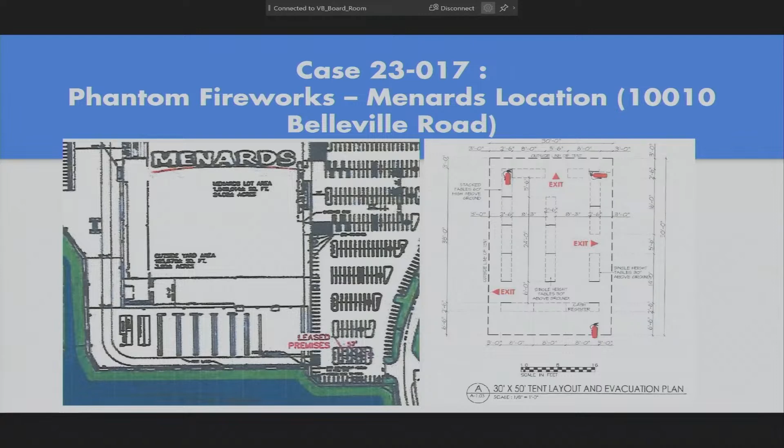Just for clarification, in the township letter, it says that during non-operating hours, all products will be returned to their fireproof storage unit. So I'm just, for clarification, the example that you gave, I don't see anything on here that describes it as a fireproof storage unit.

That's just, I mean, that's the storage unit we've been using. We use Mobile Mini. If something happens, there's a fire, you've got the 4 metal walls that are going to prevent it. I mean, after 3-4 hours, possibly something can happen. But again, this is my 13th season in Michigan. We've not had one problem with our tent or our storage unit or even being robbed.

Is it required to be a fireproof storage unit? No. A lot of companies don't use fireproof units, a lot of companies use storage units and they use pods, the smaller ones. Again, these are the bigger ones, the heavy duty ones. So again, this is what we choose to use. They're heavy duty, you can't break into them. You've got the special puck lock that you have on them. The only way they can break in is if they cut into the side of the wall.

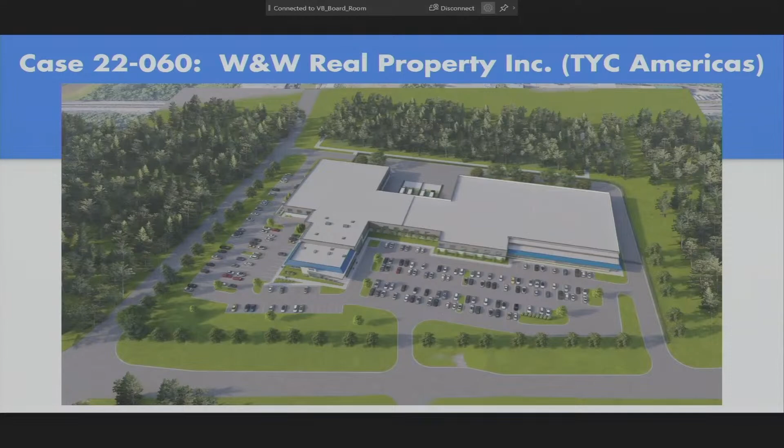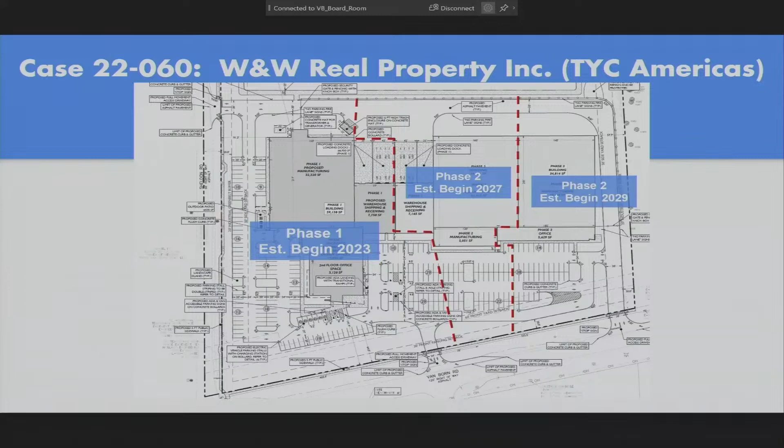With regard to access and circulation, there are 3 proposed curb cuts onto the site. 2 are off Van Born Road, as you can see on the site plan on the screen, and 1 is off Sheldon Road, and the access drives maintain a significant distance from the intersection of Van Born and Sheldon Roads. Lanes of ingress and egress are to be striped at all proposed driveways, and both driveways on Van Born are tapered, with a deceleration lane shown in the site plan. Any improvements to Van Born Road are subject to review and approval by Wayne County since the road is under their jurisdiction. The revised plans show that ingress and egress is also clearly marked off Sheldon Road, and the curb cuts comply with the standards regulating distance from an intersection.

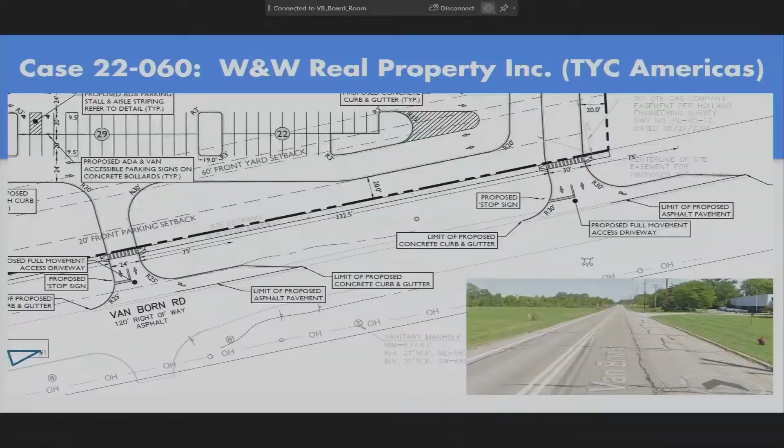With regard to traffic, the applicant previously submitted a traffic impact study. It's not a detailed traffic study, but an impact study that basically tells you the number of trips that can possibly be generated from the site and the level of service at all of the nearby intersections, to show whether this is going to have any impact or not. The study was done by Stonefield Engineering and Design, which is also the site's engineer. A minor correction on the traffic impact study: it refers to the project as a mixed-use development.

It is an industrial development, not a mixed use. And the TIS concludes that the project would not have a significant impact on traffic on the adjacent roadway.

However, since this is a significant sized industrial facility, in line with what Wayne County has required for other industrial projects within the township, the TIS needs to be submitted to Wayne County to make sure that they are okay with it too.

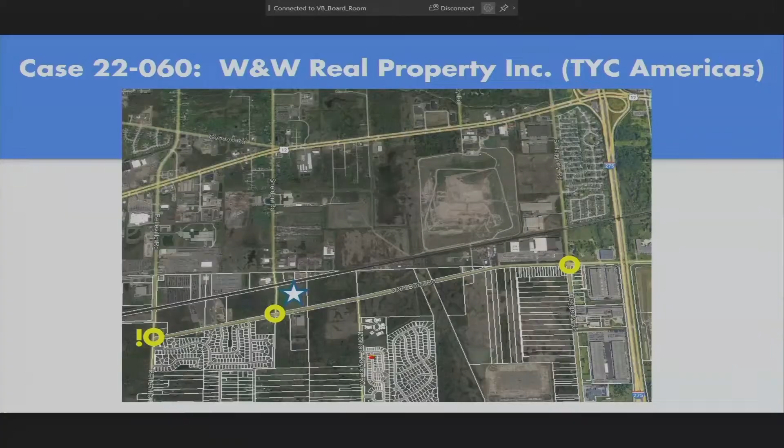The study shows that at full build, and in the study full build is written as 2025, the project will generate 134 additional peak hour weekday morning trips and 109 additional peak hour weekday evening trips. Since only phase 1 is going to be finished by 2025, not full build, the TIS needs to be corrected to show whether the 134 trips are at full build completion in 2027 or at 2025 itself. So that correction needs to be made.

The study indicates a 3% increase in left turn traffic at the intersection of Van Born and Sheldon, which currently already operates over capacity, so it is actually not functioning at its optimal level. There are levels of service at every traffic intersection, A through F, A being the best and F being fail, which means the wait time to make turn movements is too long.

So the applicant is proposing no changes. We do want Wayne County to chime in and let us know if they are okay with maintaining the existing level of service at the intersection, considering the limited number of trips that this facility is saying that it's going to generate, but we do need that clarified.

The applicant has submitted detailed circulation diagrams which show how an emergency vehicle, semi-trucks, and other waste haulers will navigate through the site, and all of those meet our turn movement requirements.

The plan shows new 5-foot wide concrete sidewalks along Sheldon and Van Born Road frontages, and on the interior of the site there are 7-foot wide sidewalks, which would provide access from their office and research wing to the manufacturing wing, and so on. There is connectivity within the site.

With regard to parking and loading, all of the spaces do meet ordinance standards and are double striped as required. The total parking requirement based upon a manufacturing facility is 256 parking spaces. The site has a total of 262 parking spaces, 8 of which are handicap accessible.

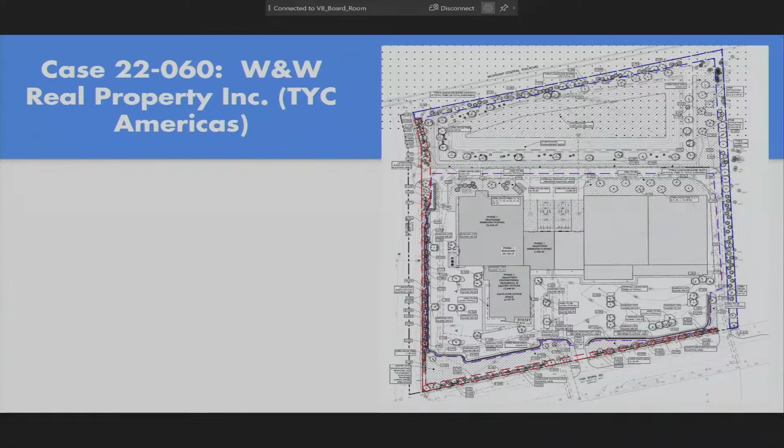All of the perimeter landscaping, the detention pond landscaping, and foundation landscaping for each phase needs to be in at the completion of Phase 1.

Based upon tree removal on the site, they are providing replacement for 6 trees because they're removing only a few regulated trees on the site, and the required replacement trees are shown on the plan.

Lighting: there are a significant number of light fixtures. These are a mix of wall packs, sconces, pole-mounted lights, and landscape floodlights. They have provided manufacturer's cut sheet detail for all of these fixtures.

The pole-mounted lights are to be 30 feet tall. Our ordinance has a limit of 25 feet. However, the Planning Commission does have the discretion to allow it to be as high as 30 feet, which you have done on other industrial sites. It does not immediately abut any single-family residential areas, so we are in support of the 30-foot high proposed poles.

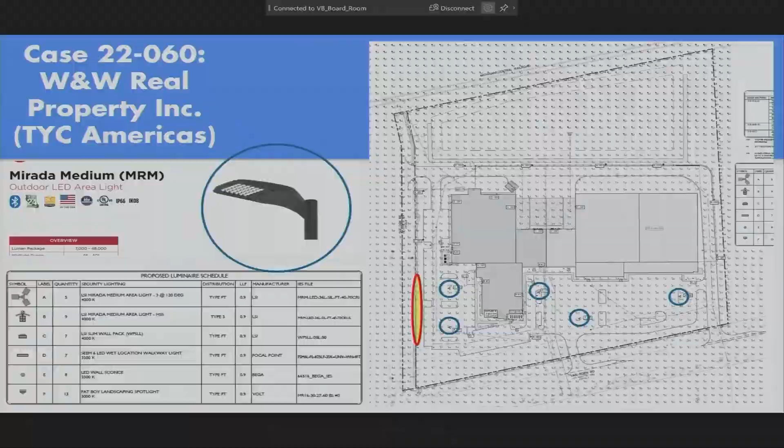In a couple of areas in the parking lot, the illumination intensity exceeds what we allow in our ordinance. Our ordinance does not allow either administration or the Planning Commission to deviate from the illumination standards. So our recommendation is the applicant adjust the illumination intensity to bring the foot candles down to what is allowable by the ordinance. Otherwise, they will have to seek a variance for lighting, which is typically not something we have sent people to the Zoning Board of Appeals for. So I would just request that they adjust the bulbs or whatever lumens they're proposing so that it is within the ordinance standards.

With regard to architecture and building details, Director Power has put it up on your screen. The building is mostly masonry units. The lower half is built of beige CMU, and then you have a gray-brown prefab metal siding on the upper half, and then there is a blue band going around it. That is basically TYC Americas' corporate colors, so they have designed the building.

The front part that you see with the blue color raised roof on the left side of your screen is basically their office and design wing. So that has storefront windows, columns, and all of the details that make it look like an office entrance, while the rear larger portion of the building is manufacturing.

There is a colored rendering. However, the Planning Commission recently has been asking to actually see the building materials once again. COVID kind of pushed us back into looking at all the colors on Zoom on a screen, so the Planning Commission wanted to see these samples again in person.

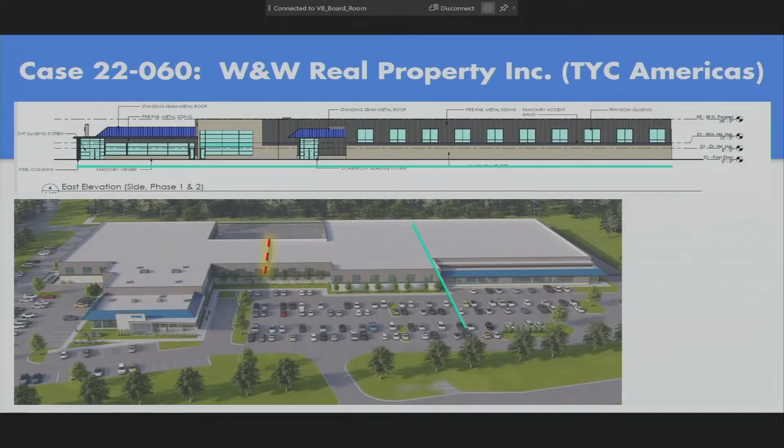One of the questions we did have was, when Phase 1 is completed, what is the east wall of Phase 1 going to look like? Because when you add Phase 2, the east wall of Phase 1 will now become an interior wall and likely be taken down in case assembly lines or something needs to connect inside. Just in case Phase 2 or similarly Phase 3 does not materialize, we need to make sure that the east wall of each phase is complete and architecturally appealing as a complete building itself. So we do need elevations of the east facade at the completion of each phase.

The required dumpster has been provided and is designed to match the building colors and materials. We want to make note that the enclosure needs to be at least 1 foot higher than the actual dumpster unit itself in order to make sure that the unit is not seen on top.

With regard to signs, there are lots of incidental signs in the parking lot, basically saying EV parking or handicap parking. Those signs do not require a permit or approval. The TYC Americas sign that is on the building will be submitted later for administrative approval for signage.

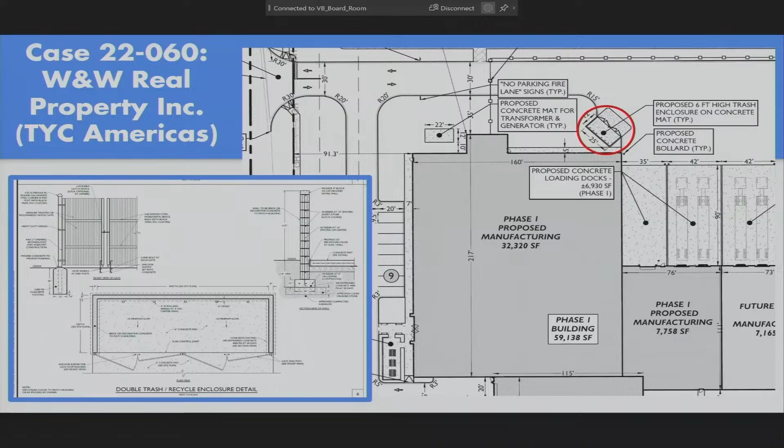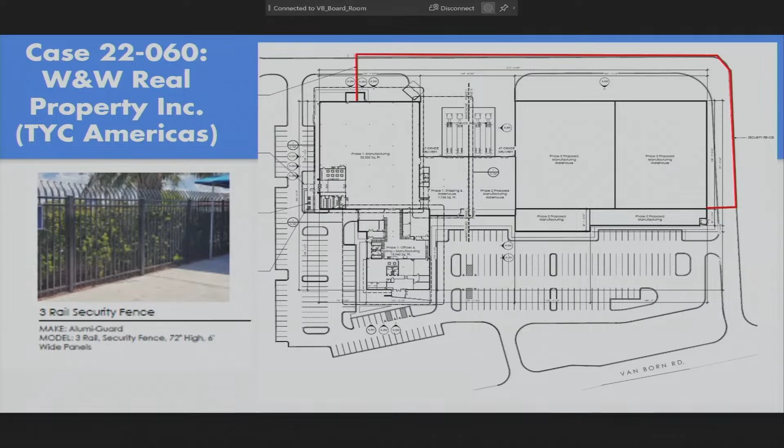The applicant is also proposing a small outdoor area for seating for their employees, with decorative benches and picnic tables in a patio area. At this time, the applicant has been working with the township for quite some time.

Initially, they picked another site which happened to be M1, until they found the site which was perfectly zoned for their use, which is M2 for all of the uses that they are proposing.

Most of the uses are addressed. There are a few minor issues, none of which will actually hold up the site plan process at this time. So it's our recommendation that the Planning Commission grant preliminary site plan approval for TYC Americas to locate its new automotive parts, office, design, engineering, research, and manufacturing facility at 44168 Van Born Road, subject to the 12 conditions listed in the McKenna review letter dated April 19th of 2023. I would be happy to answer any questions you might have.

Fishbeck. All right, thank you. At the request of Van Buren, Fishbeck has reviewed the preliminary site plan for the proposed TYC Americas Michigan Mobility Center located at 44168 Van Born Road in Van Buren Township.

This project entails construction of an office and manufacturing building over 3 phases. The proposed site includes asphalt paved parking area and driveways, concrete curb and gutter, asphalt driveways connecting to both Sheldon Road and Van Born Road, concrete sidewalk, full stormwater collection and retention system, water and sanitary service connections to the proposed building, and other various landscape and site plan improvements.

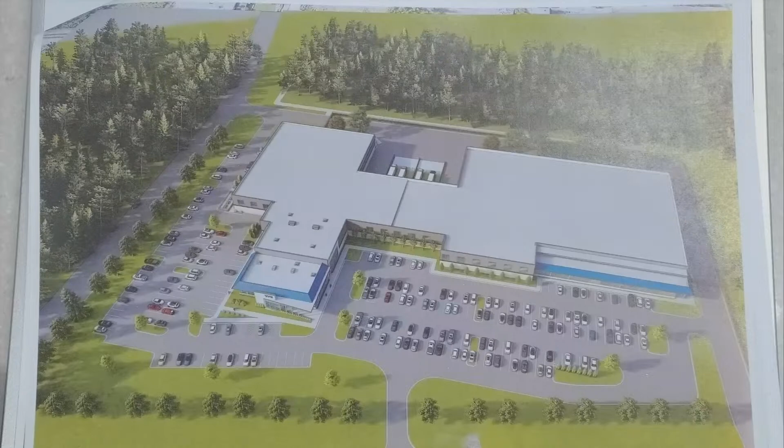The applicant's plan indicates 2 connections to the existing water main in Van Born Road. Their water main then loops the property with a 12-inch C900 PVC water main with four hydrants and six 12-inch gate valves and wells. The building will then be serviced by a 4-inch connection for the water service and a 6-inch connection for fire suppression.

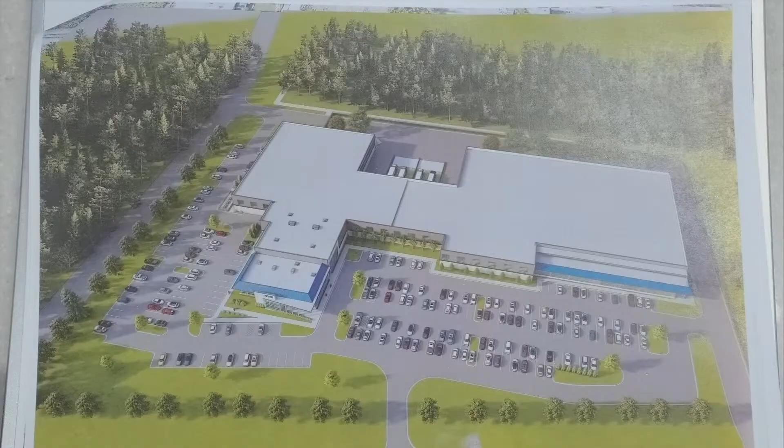We're requesting additional water main size and material labels to be added to the plans. Currently, it appears that water main was only labeled once, and we would just like the material further clarified. During the engineering review, the township will make the final determination of what water main material they want on site.

For water main layout, we would like the applicant to verify utility spacing between the water main and the other utilities; it has to be 10 feet per the state. On the west side of the site, we were looking to see if we could get the water main moved over to the parking lanes so that if there's any access needed on the township's part, vehicle travel lanes aren't disturbed or blocked, and any work can be done in the parking spots.

We had a note that was on our staff review as well. We were looking to see if the applicant has verified water main size based on the required flow and usage for current and future phases. We believe the size of the loop may potentially be reduced to an 8-inch loop based on the facility water requirements. The applicant may reach out to the township engineer to discuss available flows for the proposed loop.

Hydrants are to be located 5 feet behind the back of curb, and also the easements need to extend 6 feet past each hydrant. We're also commenting on the water main that we might require the water main extension on the northeast corner, bringing the water main to the property line for any future expansion of the property to the east.

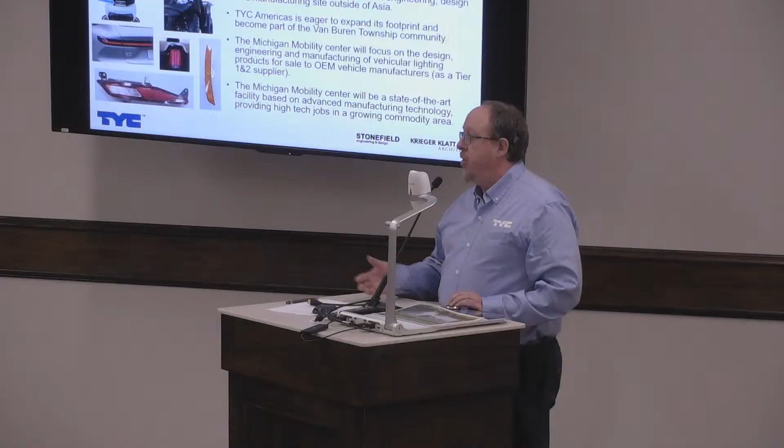And the last point is our development. We're intended to be a state-of-the-art manufacturing facility. We're going to have a lot of advanced manufacturing technology inside, and we'll be providing high-tech jobs to a growing area in automotive business. Lighting is a substantially growing commodity. Maybe you guys are seeing that chrome is going away from cars and lights are being added. So you see things like lit emblems, lit stripes on cars. Those are the kind of products that we'll be making at this site. So with that, I'll turn it over to our professional team, who's going to talk a little more about the details of the development.

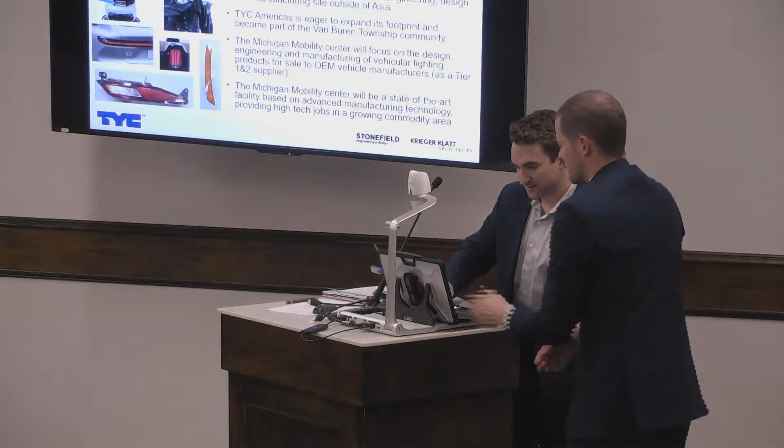I'll just run through the site briefly. You guys gave a very extensive review already. Can I control it here? There's a rendering on, I think you can. I believe only Mr. Newman is on the Zoom. You can view any of what we're looking at on the YouTube channel, anybody who's watching tonight. The Zoom screen is black right now, so you can use that for the presentation.

This is the overall site, colorized rendering. Tonight we are seeking site plan approval for the overall 3-phase development. It's about 138,000 square feet of manufacturing, research and design, and accessory offices, shipping and receiving. Each phase as it comes through would be self-parked for the building proposed. We're also, as Vidya stated, providing the extensive landscaping required, all part of phase 1, except for the internal parking lot areas on the east side along Van Born. With that, we are proposing access to the site: 2 full movement curb cuts onto Van Born and 1 onto Sheldon on the northwest corner.

We were in receipt of all the comments. We will provide, before final site plan approval, and will work with township staff to provide a compliant lighting plan, as well as stormwater management between Wayne County and township staff. That also goes for all site utilities. We'll be sure to coordinate with the township engineer and make sure all of that is compliant.

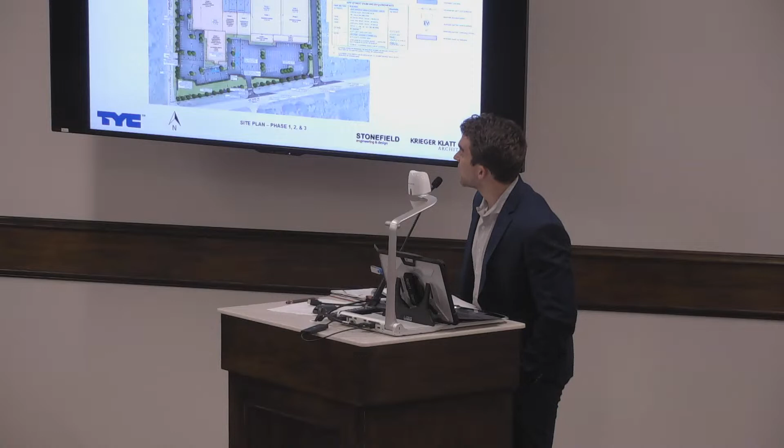Traffic-wise, the TIS will be updated per comments received, as it has been and will be. The impact study has not been submitted to the county yet. We're waiting on preliminary comments from them for the overall site and the trip memo that was submitted to them. That will be submitted, and we'll address all comments from township staff as well as the county.

The overall site development will be creating 134 trips in the morning peak hour and 109 in the evening peak hour. The phase one development itself will be providing less than 100 new trips. We do understand that the intersection at Belleville and Van Born is already existing, operating at a level of service F for the left turn. We will update our study accordingly, and work with township staff as well as the county to provide all approvals necessary. With that, I'll give it up to the architect to talk about the building and go through some of those comments, but happy to answer any questions later on.

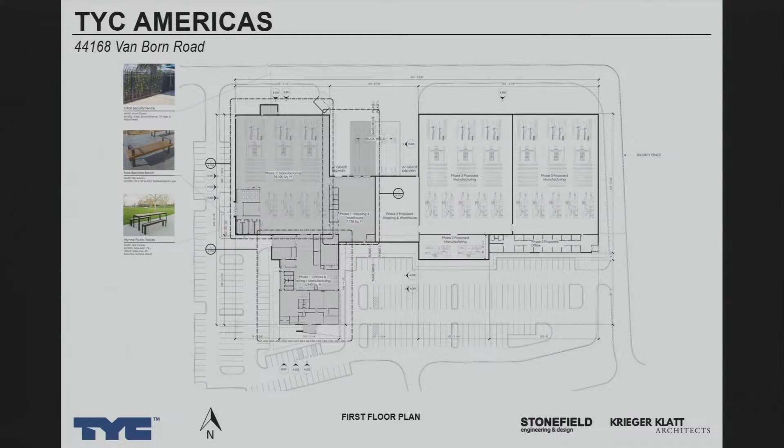One question came up about the materials, and I think that's a very good question. What we will do, and we can show it on the plans, is wrap the materials so that when the next phase goes on, you would punch openings to go from phase to phase. We have a rendering showing that in the presentation, showing that eastern wall.

One thing I want to point out is that the mansard roof came about because we have rooftop units on that roof, and we have to screen it. So we thought we could do it in a creative way with a nice mansard roof. Gives it a little bit of design.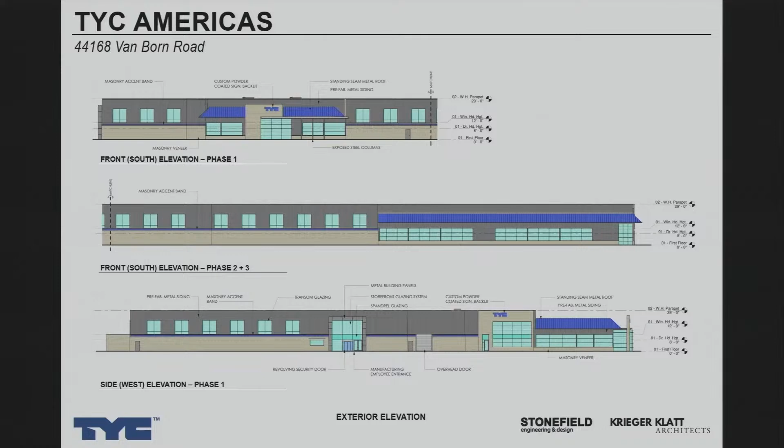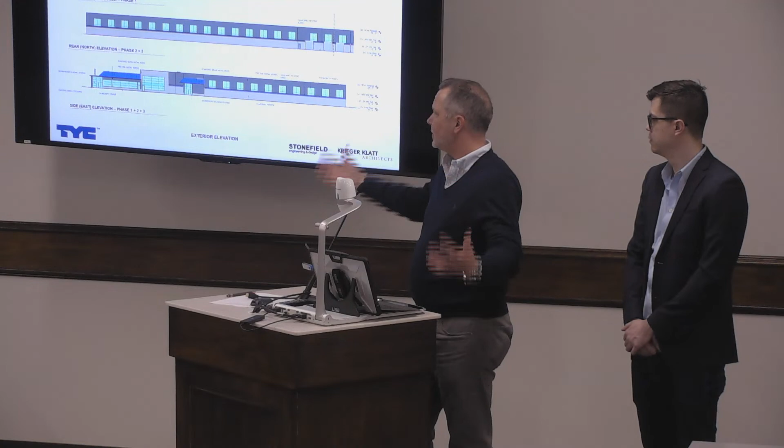Another thing I want to point out, which you don't often see in industrial manufacturing buildings, is there are a ton of windows in this building, so it'll be a very well-lit facility. It's going to be very high-tech, and it's going to be a wonderful space. In fact, the back manufacturing areas have an actual cavity wall because it's highly conditioned. So this is going to be a very, very wonderful facility.

And then here's an aerial of the site, which you've all seen plenty of times tonight. So you see phase one, and you can kind of see where the other phases go.

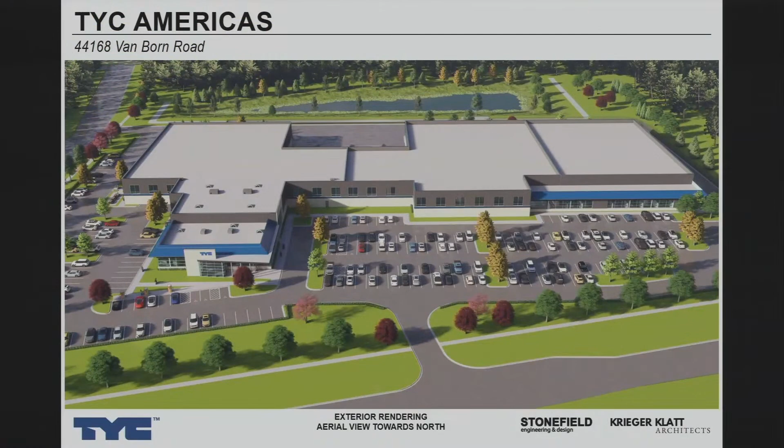EV charging stations, again, just to highlight the technical side of this business.

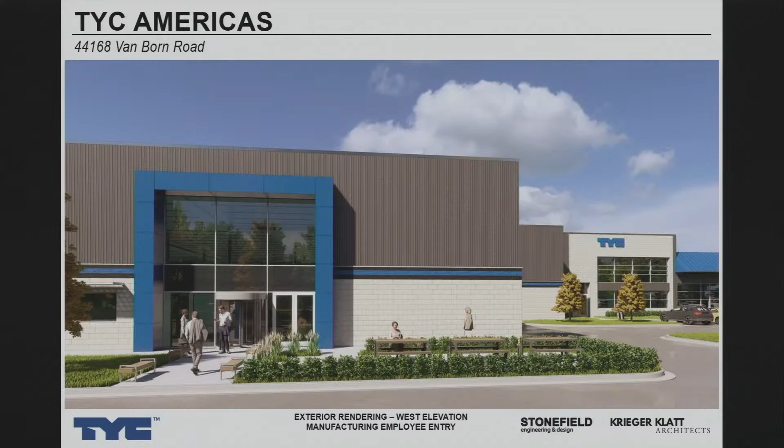This is on the side of the building. This is the employee entrance, a little break area. And we have a couple images of that, another aerial. This is just kind of going around the building. You can see the truck dock over there, the retention detention basin.

So this is the rendering of just phase one in the eastern wall, right there. The intent is to completely finish it all the way out, and then when they're ready to start the next phases, they're just going to deconstruct as required, punch some holes in, and pick right up where they left off. But we definitely want to finish that.

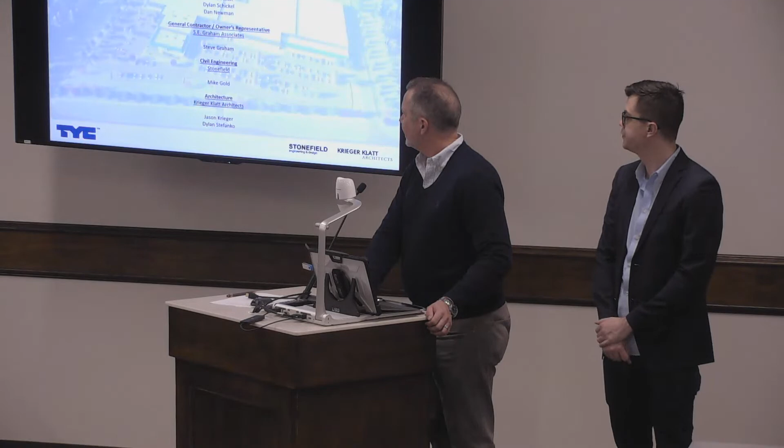That's it. So we're all here for questions, and we're happy to answer them.

Thank you. Okay, do we have any questions from the commission? Through the chair, I do have a question. Commissioner Grant, for the applicant.

For the manufacturing side of your building here, what is your proposed mechanical systems for that? So it's going to be, we're looking at rooftop units. It's going to be forced air. And due to the nature of their manufacturing process and testing, you know, we are...

Could you talk into the mic, please? Thank you. So it is going to be rooftop units, forced air, and due to the manufacturing nature of TYC's product, they have pretty strict environmental controls. So we may look at individual systems that serve those specific manufacturing or testing areas, but it is going to be rooftop mounted forced air units.

Maybe this one's for Director Dan. Is there a requirement for screening for that as well? I'll probably look for some assistance with the planning consultant, but the view shed from the public right-of-way and the adjacent properties are going to be what's most important for mechanical equipment screening. And I think this meets the intent.

I'm talking about the high bay area, not the front office stuff. Yeah, so at the lower roof, like Jason mentioned, we looked at the mansard to try and hide some of those. And due to the large space that we have, we would strategically locate these, and if there is an issue with sight lines, we could certainly look at an architectural screening product that would match the rest of the building.

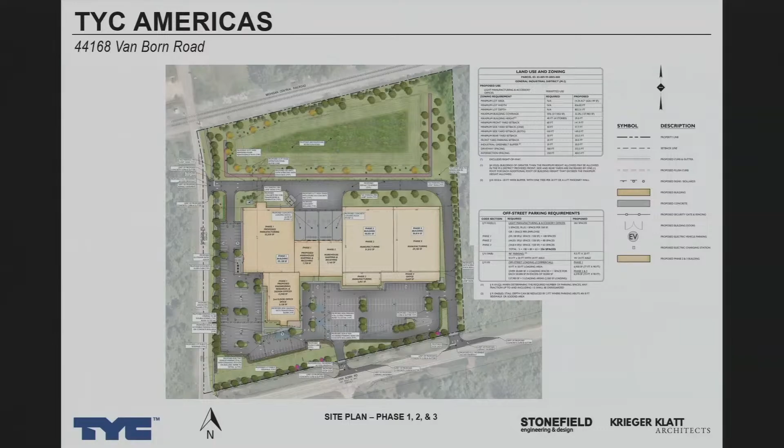Is this the sidewalk over here? That's the sidewalk with the crosswalk. So it's landscaping on the inside of the sidewalk towards the road? It looks like it's a little hidden by the trees in the image. Frontage landscaping is required on their property, not within the right-of-way. So it's right next to the sidewalk. That's what I was wanting to see.

Great. I have a question regarding the spiky detail on the fence. I don't know if there was a material sample for it, but I didn't see it. Is that to be provided before? They had a detail on one of the sheets. There is a fence detail which shows the spiked design. It is painted aluminum fence.

It's up there. Do we have it? So it's aluminum, which kind is it? Is it the kind with the bent tops, or is it the kind with the fleur-de-lis tops? No, it's not the fleur-de-lis. It's the bent tops, like we've seen on a couple of ones. Like at the data center at the end. Yes, not like the transaction processing center. Okay, not like the impaling ones. These are the curved ones, not the pretty impaling ones.

Oh I see, I guess it depends how you try and jump it. I think that's true. Okay, it was included in there, so for our preliminary we would want to be able to say that those were acceptable, or would that be okay? And you believe the bent ones are an acceptable model, you've verified the model? Yes, this is consistent with what we have approved on other industrial sites for security reasons.

Okay, super. I had a question for Mr. Lepick. I didn't understand, you were talking about a retention pond to the north, but it sounded like maybe that retention pond won't be allowed. I think I missed that. Is the idea going to be to convert it into a detention pond? Correct, yeah, you can either do retention or detention. Retention collects stormwater and keeps it on site and infiltrates it.

Good thinking. One final question, again a forecasting question. You say you have other facilities. With you having to do the traffic study, and it's already indicating an F, what are you thinking the direction Wayne County will go in as a resolution to the F?

I'll defer on this, so that's hard to say. The county sometimes, in other areas, we've shown recommendations, for instance, for deceleration lanes, and the county has come back saying they don't want them there. So it just all depends on what they see for their road at that time.

We will be submitting—we're going to update this study per the comments we just received, and we'll resubmit back to the township engineer and then also to the county to get their feelings on it. But it's hard to say what their feelings would be because it's already an existing condition. And phase one, which would be implemented within the next year to two years, would truly have no adverse effect on it—it would still be operating. Only until 2029 would it be 130 trips at that peak hour.

The only other thought I have, talking about this F, is I know that at times we could potentially ask that the trucks not come up and down Belleville Road. Have you had similar requests at other locations for this?